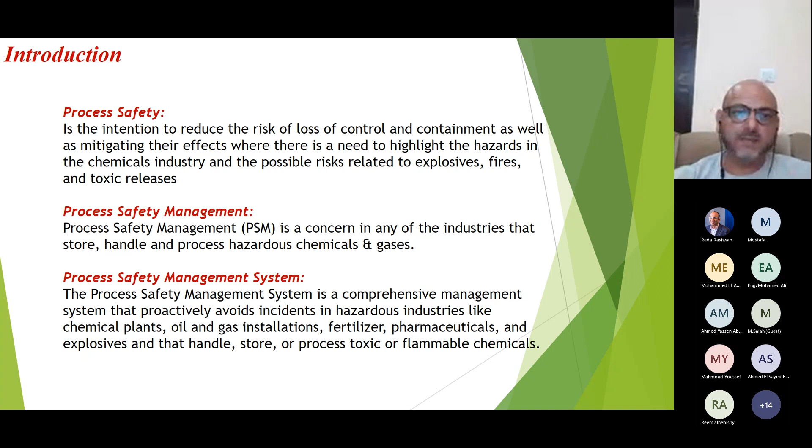Time. When we go to a process safety management system, there are different systems, or international standards, if I can call it standard, and I can call it standard actually. We have process safety management system, a very good one. It's one of the initial ones that was implemented. Actually, it's the first one that was implemented as a process safety management system.

Following that, OSHA came into the picture. Then CCPS came with its risk-based process safety approach. Then Shell generated their own standard. They call it asset integrity and process safety management. And so on the ground, we have around 5 process safety management systems.

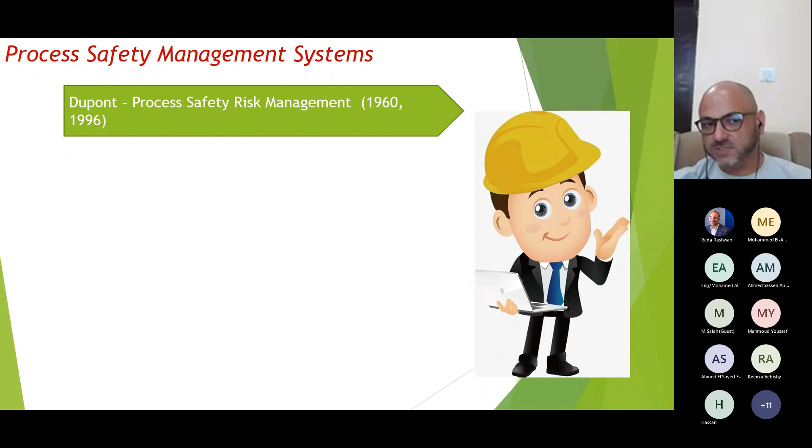First one is DuPont, and as I mentioned, they started from 1960 to develop this process safety management, and they call it process safety risk management. Following that, OSHA started by 1993 to develop one regulation for process safety management, and the Energy Institute provided their own, CCPS for risk-based process safety approach, and finally the Shell standard. So these are international standards.

So we need to highlight this. We need to make a spot on this. We need to tell others. When you put yourself in a new company that is developing process safety management, and people there are unaware or they don't care about process safety, for them this is a bureaucratic or inhibiting approach.

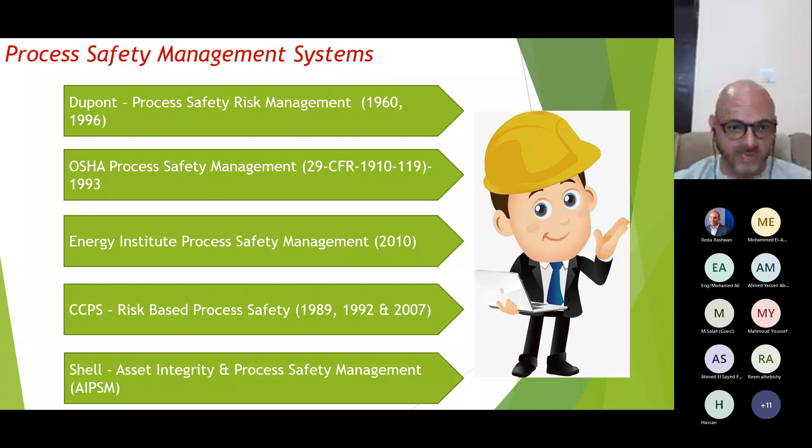Tell them, guys, we have a process safety management system supported by international bodies, supported by international companies, supported by international standards. We have 5 major standards, and you can tell them to refer to the standards, and they can go and learn about it. Or you can pick the best solution, which is you refer to the standard and you give them a hint about each standard, so that they will start linking their mind and their thinking with process safety management and how it comes and how it runs.

So just to give you an overview, and to make sure that there is no confusion, there is no process safety management better than the other. If you go in detail in these 5 process safety management systems, you will find that they are talking about the same subjects, but some systems are integrating elements together. Some of them are disintegrating elements.

My opinion, and it's my personal opinion, and that's what I'm going with, is always go for the disintegrated elements, because it will disintegrate to the fine element, and that's how you can make sure that you are covering the process safety management system properly.

So we have DuPont, they have 14 elements. We have OSHA, they have their famous 14 elements. We have Energy Institute and CCPS risk-based process safety management system. Both of them are 20 elements. And we have Shell asset integrity and PSM standard, which I think is 14 elements as well.

So this is just to give you the flavor of why process safety management is important. And it's not important only at the level of individuals and companies. No, it's at the level of organizations. Since organizations are creating regulations, creating standards, creating rules, that's not for fun, or that's not nice to have.

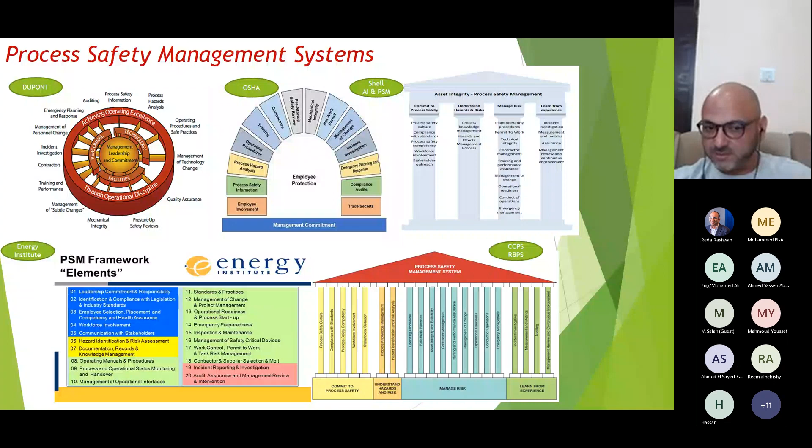So now we came to know that we have process safety management systems and they are important to be implemented. So let's go to the pillars. As I mentioned, we need to agree that this is the platform that we need to move through. Process safety management pillars: the main cornerstone is, first of all, to take the commitment that you are going to have a process safety management system, because the commitment means consent, means that we are transparent and we will implement it.

We need to be safe. We need to operate our facility properly. We need to have a minimum number of unplanned shutdowns. We need to have minimum reliability issues. We need to have our equipment running. We don't want to lose the warranty. We don't want to lose our customers.

We will spend, because the implementation of this process safety management system means that you are going to pay money to put this system in place: software, documentation, man-hours, follow-up, activities, auditing, getting a third party to do audits. This is money spent to implement it and make sure that it's a reliable system. So you need to commit. You need to say that I'm going to commit.

Management commits, and says that we are going to implement it, we are willing to pay whatever it requires, and we will encourage the company to follow it. And we, at employee level, need to commit to implement whatever comes from management. That's why we are working there. If you feel that management is requiring something you don't want to implement, look for another place that fits your purpose. As long as you are signing a contract with a company to stay in this position, we have to obey and follow the rules. So first of all, commitment, which has two sides: leadership commitment and staff commitment.

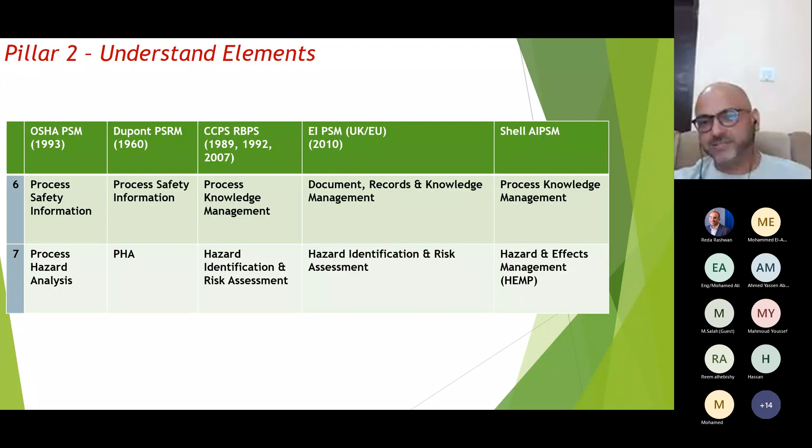And then there are elements related to understanding the hazard, which we will go through in later lectures, inshallah. And there are elements related to how to manage the risks and manage the hazards. Within these elements, you will find our topic today.

OSHA calls it pre-startup safety review. DuPont also calls it pre-startup safety review. CCPS risk-based process safety approach calls it operational readiness. Energy Institute calls it operation readiness and process startup. Shell asset integrity and PSM standard calls it operational readiness. So it's all, as I referred on the first front page, operational readiness and pre-startup safety review integrated together.

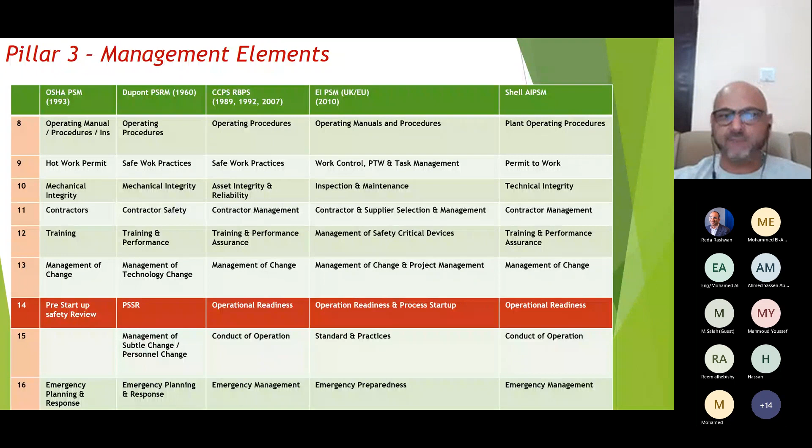Whenever you hear operational readiness, this is a big umbrella. One of its key elements or sub-elements will be the PSSR, which is our target for today's session, inshallah. And the final pillar is learning—I mentioned the learning elements there for your information also. So it's showing different elements for each standard, how it follows.

And from here, we can start to go through our short journey today. I'm expecting it will not be long, but till now, I'd like to know if anyone has any question, please let me know.

No questions? Can I proceed? Okay. We have someone? Yes, sir. Okay, I thought someone wanted to ask something.

Okay, so you will proceed with focusing on the OSHA one. I'm not going to focus on one standard. I'm going to focus on the PSSR itself, which is the same process applied in all standards—it follows the same criteria.

Yeah, I see. Okay, so the aim of this is just to bring people from our seats. Now we are relaxed and feeling comfortable, and I just want them to jump into a PSSR. So before jumping to the PSSR, I want to take them through the gates of PSM till we reach it.

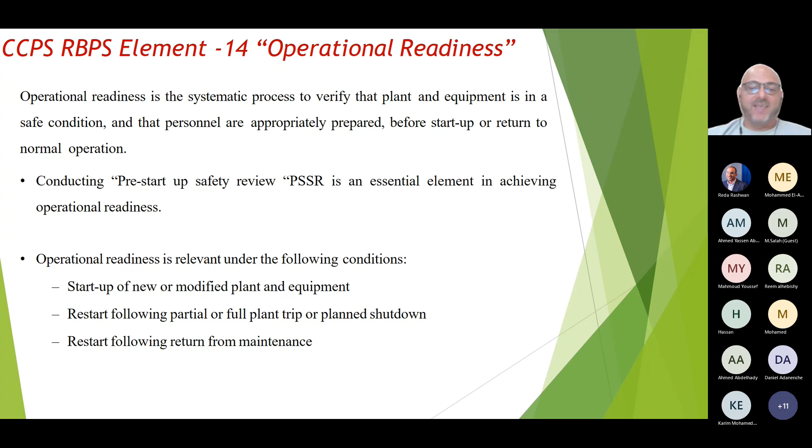Bismillah ar-Rahman ar-Rahim. So again, let's go back. PSSR purpose - why do I need the PSSR? PSSR is applicable for steady state operation involving any modification in the plant, with a change in the P&ID, ESD system, DCS system, installation of new equipment, systems through management of change process. So any new change happens, either through an MOC, and some companies are putting the PSSR as a part of the MOC. Some companies are linking the MOC system to the PSSR system. So at the end, any change or modification will call for a PSSR after you complete everything before you start the facility, and also if it's a new facility, as we mentioned.

PSSR intent is to supplement and make sure - let me underline this. We are not doing design reviews in the PSSR. We are not meant to do HAZOP. But just to make a clear statement, we are not meant to do design reviews, we are not meant to do HAZOP. We are there to make sure that these things have been done properly, and the recommendations coming from there, the actions coming from there, were implemented. So this is very important.

Then it makes sure that the construction and the installation are good. So we are not meant to do the work of design, or HAZOP, or construction, or installation, or maintenance. We are there to make sure PSSR is there to make sure that these things have been implemented already, and the recommendations are in place and things are safe.

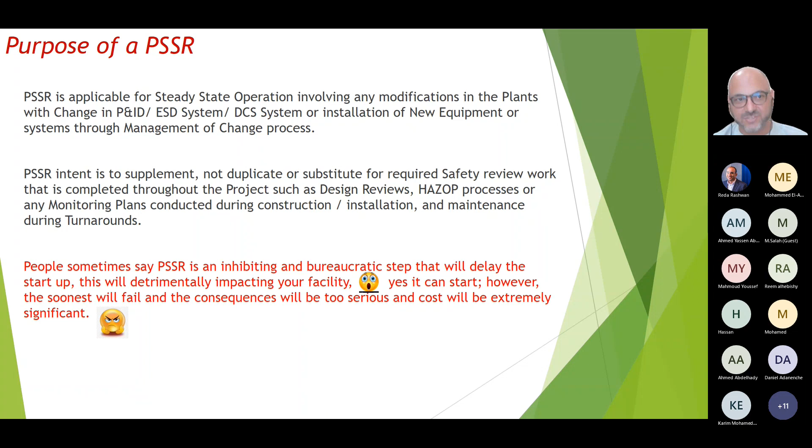So the purpose of the PSSR - how will the PSSR help? This is the question we need to answer. How will the PSSR help to ensure that once the facility starts, it will continue running and avoid project delays or serious cost implications? The answer is as simple as follows: number one, confirm that the system is built as per the design and is operable and maintainable safely and reliably - and between brackets, 'is', not 'can be'.

Can be means accept yes or no percentages. It might or might not. It is not can be, it is. So confirm that the system is.

Because sometimes when you go to a PSSR and find a deviation, maybe someone comes to you and says yes, but it's okay, it can be moving, no problem will happen. No, my friend, the system was designed as this and was hazard.

We assess and test the risks and hazards, previously in the QRA and after that in the HAZOP and SIL, then QRA, HAZOP, and SIL. Based on this design, it needs to be here. Whatever we have in documents needs to be on ground, or else we need to re-estimate and re-evaluate the situation now.

Number two, it helps us make sure that whatever equipment we procure from outside and bring on site is as per our specification. Before you import any equipment, you send a specification to the construction company, vendor, or supplier. I need this specification, and you need to check it before you put it on site.

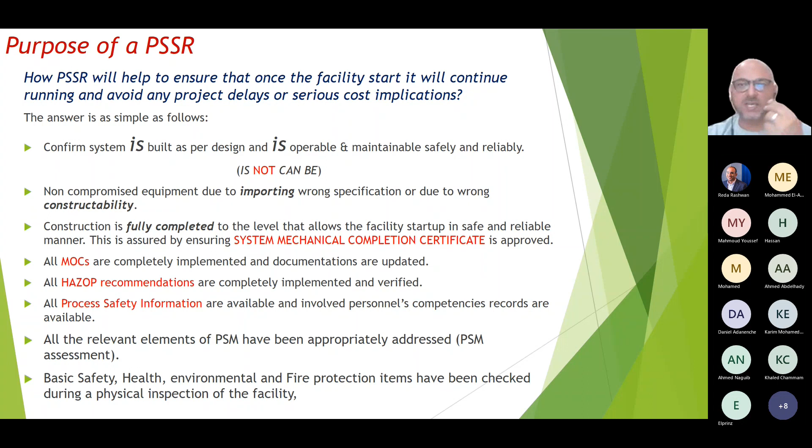Just here, because I mentioned here all process safety information are available, just to make sure that the terminology of process safety information is well known for all the participants. Process safety information is the written safety information which covers the hazards of the chemicals used in a process, the technology, and the equipment. So you have the full information about the process area, so you are safe to operate it.

This includes but is not limited to the following: P&IDs, PFDs, flow diagrams, operating procedures, isometric drawings, data sheets, safety data sheets, engineering calculations, relief valve calculations, control scheme, control narrative, codes and standards that you follow, relief load summary, flare load or flare check or flare study, QRA, HAZOP, SIL, the reports. These are some examples of process safety information, just to let you know what we are targeting when we say process safety information.

So this is a very important and critical element of the process safety elements, and just to link things together, it's a part of the PSSR to make sure that all the documents related to the scope which we are going to start are available and are reflecting the actual.

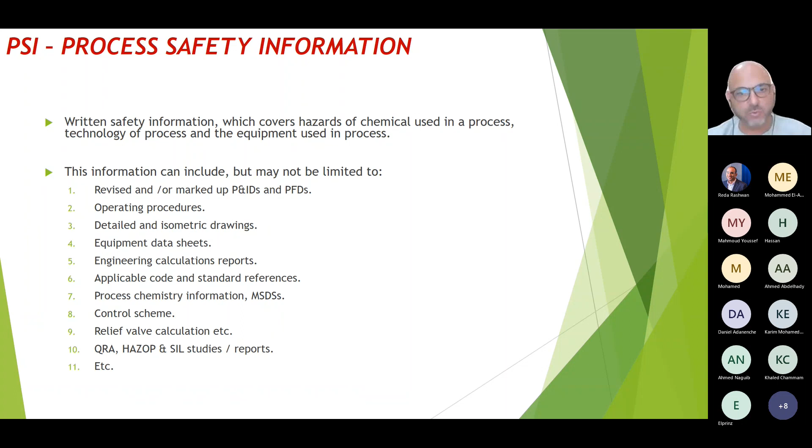I'm not having an old obsolete document which is irrelevant to the existing facility, and it ends up with the operator using an irrelevant document to start the facility. So definitely he will mistakenly operate the facility, and we will have undesirable consequences.

PSSR types. As I mentioned before, we can do PSSR, but for what? We can do PSSR not only for process areas, but for control room buildings, satellite control buildings, substations, and process areas. So it's not only for process, it's also for non-process. But is it the same check I'm going to do? No, my friend, no. Each type of PSSR has its own checklist developed by the Process Safety Management Department to focus on this scope. So if we are going to do a satellite rack room or a control room, there is a defined checklist for this.

You cannot use this to check the substation, and you cannot check the substation using the control room checklist. And you cannot use any of them to check the process area, and you cannot use the process area checklist for the others. So just keep it in mind. And I can see some of you thinking this can't happen. I'm telling you, please don't be so confident. I saw it happening, and it's still happening. I hear it's happening in some other places. So it's happening, my friends.

So please make sure, whether you are a PSM representative, or a process engineer, or you are in operation, or integrity, or maintenance, or any other engineering discipline, as you are included in a PSSR, make sure that the checklist you are going to use is relevant to the scope that you are doing. And another thing to make sure of: you are not wrapping the checklist, putting it in your back pocket, and doing a safety walk.

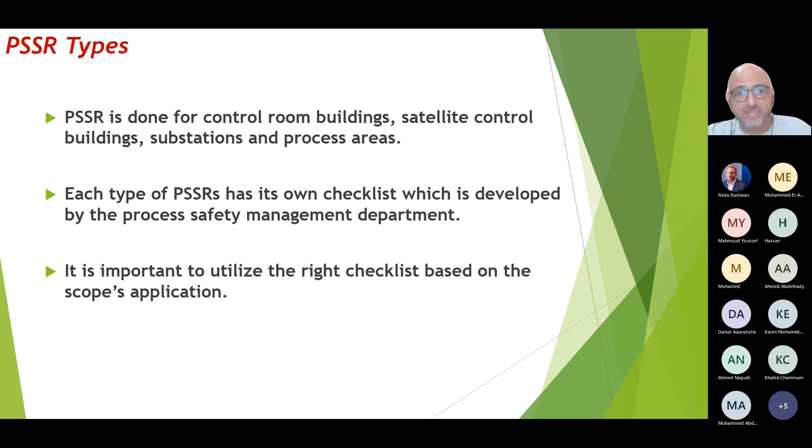So please, this is my humble begging to you guys. If you have it and you want to implement it, implement it. Don't have it just as a matter of documentation, because it will mislead the management. And the time management discovers that you have hidden this information will be the same time the gentleman or lady who did this will leave their job. At the end, your intention to start quickly was to satisfy management, and unfortunately, management will not be satisfied if you start wrongly.

So, PSSR workflow. Let's see how we are doing the PSSR. First of all, initiation. Let's say that you are the area operation manager or plant manager, call it whatever you want in your facility, and you have received the mechanical completion certificate or dossier from the contractor, or sometimes a readiness dossier, and you are ready to introduce hydrocarbon or to start the facility. So you want to call for a PSSR.

First of all, you assign a PSSR lead. Then this PSSR lead will pick the team and make sure this team is multidisciplined, and each discipline has a specific name with an email and contacts. Then you send them a notification: guys, we have this scope for PSSR we are going to do. Please be invited to attend the next stage, which is the kickoff meeting.

Then everyone goes to the kickoff meeting, they listen, and the PSSR lead is explaining the PSSR scope, what we are going to do. So he's presenting a small scheme, first of all, a marked-up color scheme, some nice colorful slide to show what is the process area or the substation or the building, what scope we are going to do. We are going to do the PSSR for the whole or part. It can be a partial PSSR or a full PSSR.

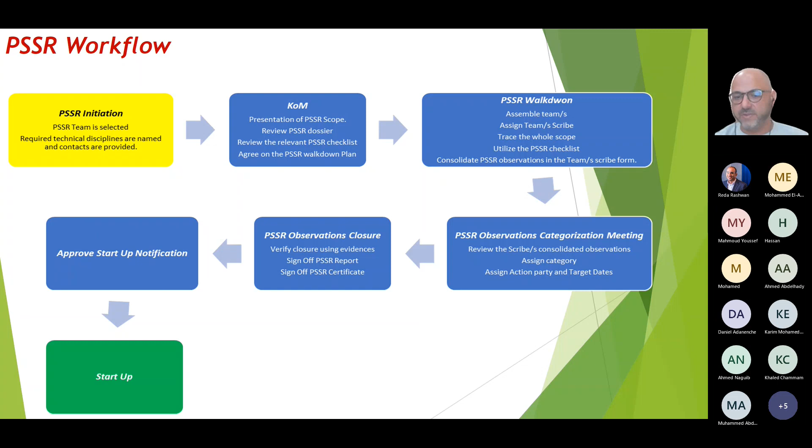The PSSR team formation is very important, and it's the responsibility of the asset owner or the operation head to nominate the PSSR lead. And the PSSR lead will assemble the team. And the team, as we said, should be multidiscipline, and all should be experts or subject matter experts of their disciplines.

I shouldn't have someone who doesn't know about this area participating to represent engineering or operations or maintenance or process. He should be aware about this area. He should be the focal point, the nominated person for this area. He's the best one to answer any question in relation to his discipline.

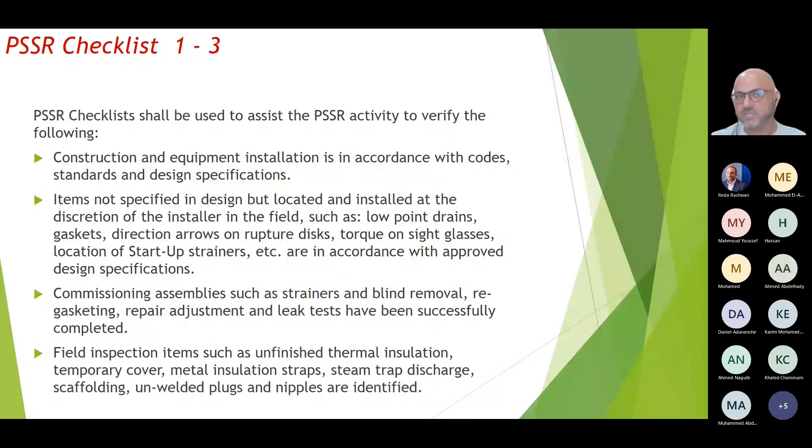Checks can be conducted whether there is no deviation from instrumentation, logic, control philosophy is implemented, procedures are in place, people are trained, safe work practices are being highlighted, work permit is available, and people know how to utilize it. Documentation and records as-built status. I mean, the documentation should be updated to the as-built.

We said that approved for construction, as Mr. Khaled was asking, if I have a new MOC or a new equipment to be introduced after the approved for construction. That's why we are producing the as-built version once we start the facility, not before. After we finish all the additional units or all the add-ins, we finish everything and we are ready.

Now this is the way we agree. This is the design that we are going to start like that. There's no more modification. This is the as-built, and if I change later on, I need to review and issue a new version. Make sure that the HAZOP, and this is very important, HAZOP recommendations.

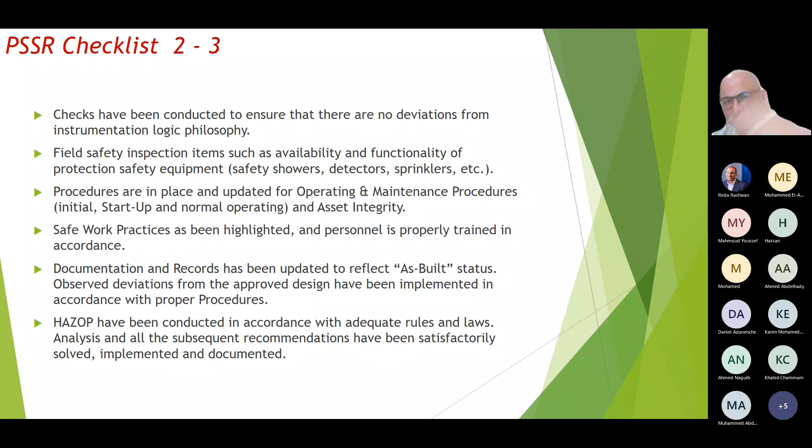People make the HAZOP, put it on the shelf. You need to go on site, make sure that the HAZOP recommendations have been implemented, ensure that the MOCs are implemented, training has been conducted for operations, maintenance, emergency, and other disciplines, confirmation that the emergency response plan is available and is implemented. It's not only available, because the plan at the end is a procedure, it's a document, it can be on a shelf, it can be in a drawer. Without implementation, zero, it has no meaning.

Additional safety measures like notification to authorities, surrounding communities. People know that we are going to start. This is one of the process safety elements, which is called stakeholder outreach. We inform others about what we are going to do. We are going to start. Keep in your mind, startup and shutdown are the most risky operation modes of any facility.

And the most risky one is the startup, because this is the one where you are introducing hydrocarbon to a new facility, so you need to make sure that you flushed well, systems are well inerted, and you are not introducing hydrocarbon into air with a nice spark, and we'll have all fireworks and no fun time. So these are some of the additional safety measures that need to be checked.

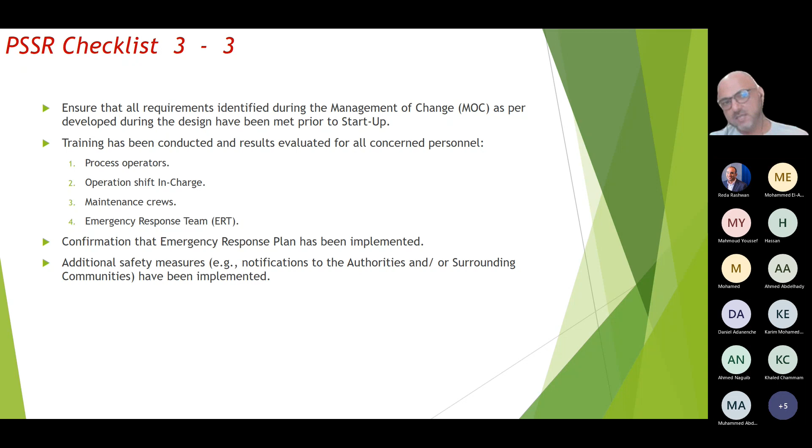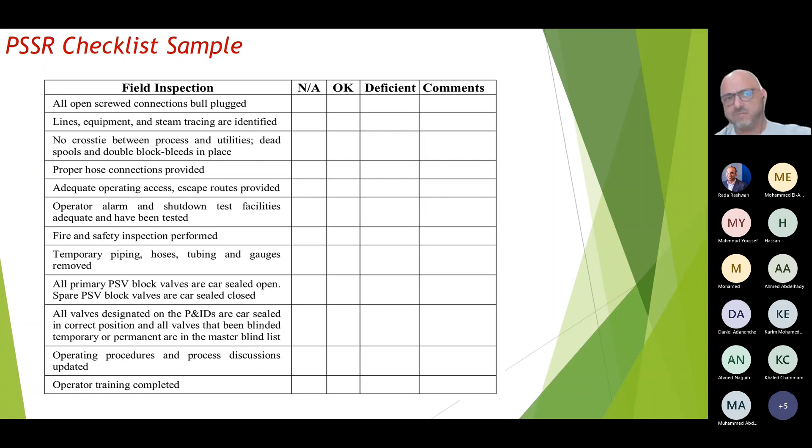These are sub-samples of the checklist that you can go through and check one by one, just the same that we have just mentioned. And you just mention here either yes, met, or not met, or not applicable, as I mentioned. Okay, and then you sign, and if there is a contractor representative, he needs to sign.

This is the checklist that we are going to compile all our observations in, and then start to categorize and add an action party, who is going to implement the action, and when he is going to implement it, whether it's A or B.

It should be done before, or it can be done after. And finally, the PSSR report should include all the information with regards to the PSSR, from an executive summary about the scope, introduction, the purpose of this PSSR, the team members who participated, what method we followed, the checklist. The method will talk to the checklist that we use, and then the observations or the punches that we had,

the categorization, and where the evidence is for the ones that need to be done before we start up, and what are the names and target dates for the ones that are pending or can be done after starting up, and then the conclusion. That's what you need to submit to management to get their approval. Then they will give you the authorization to start up.

Now, do you agree with me on this statement? We agree that PSSR is vital and we have an idea how to do it. Yes, please. Yes, you have an idea, sir? Yes. Alhamdulillah. Fine. That's good.

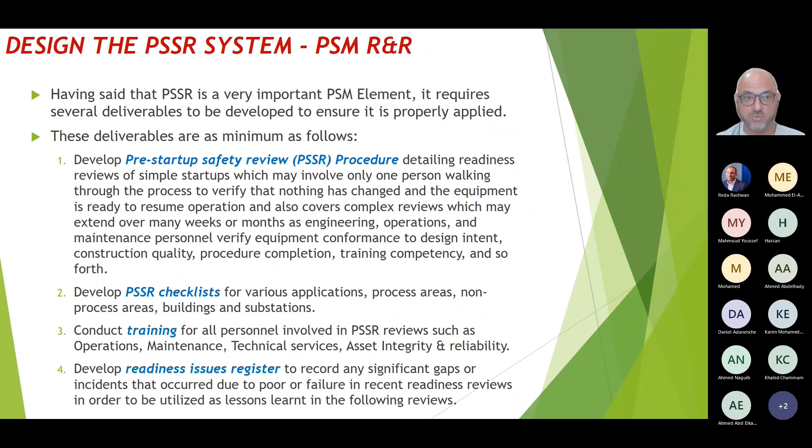Performance metrics: there are some performance metrics we can use to check the performance of our PSSR. Maybe the number of equipment that was wrongly constructed, or people who are not trained, or some off-spec product came due to a startup problem in the startup procedure, or we can talk about the facility start and the facility facing a lot of spurious shutdowns after starting up.

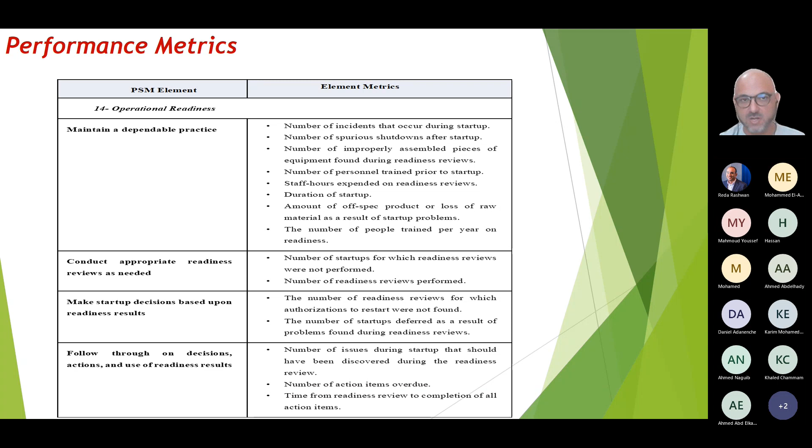Incidents happened - these are all element metrics. Also, we can take records for the number of readiness reviews that have been conducted, or the number that have not been conducted before the startup, or the number of action items that were taken, how many were closed, how many overdue. This can all be captured as PSSR performance metrics.

Then, when we identify gaps, there are effectiveness improvement items that combine. One of them is combining the readiness practice with the MOC. Make sure that the PSSR is part of the MOC, so you make sure that the PSSR will happen. The MOC will never happen, will never be approved until the PSSR is done.

A PSSR is to make sure that the MOC is completed properly, designed properly, implemented properly, and is going to start up. So we have another level of consent before starting up, before livening up the MOC, to make sure that the change is safe.

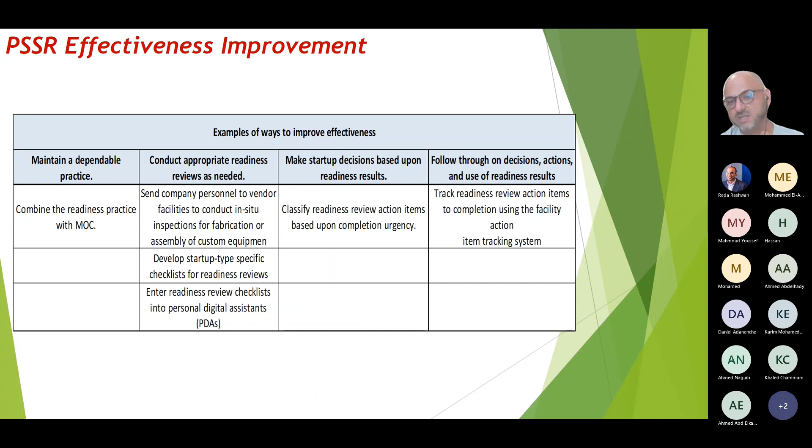This is part of developing a startup type checklist for readiness. Also track the readiness review action items. This can also be used for effectiveness improvement, just to make sure that your efficiency in doing the PSSR is increasing. And finally, management review.

You are providing management the guidelines on how they can see the PSSR performance, how we are doing the PSSR process. They can review a random sample of the readiness reviews or the PSSRs and see the quality of the document. They can determine whether the readiness process is being used or not.

That's by identifying whether there are facilities started without their PSSR. There is no record for PSSR, there is no sign of PSSR certificate. So this is a point that management can use to review.

Also, intervening and interacting with employees, asking questions about how the PSSR is happening, and what is your understanding about PSSR. This gives an indication on the competency level of people on PSSR.

Determine if any incidents, deviations, off-spec, or problems happen due to lack of PSSR. In the investigation of an incident or production upset, one of the gaps identified may be the root cause or the contributing factor - we identified that the lack of PSSR was there.

So all of these can be used by management to review the PSSR performance and to see that PSSR is being done properly. I really would like to thank you all for your kind support and participation, and I hope that it was quite to the level that you deserve.